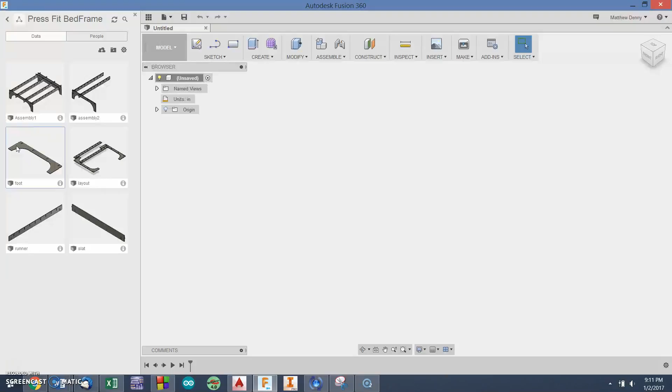Once I have this, I'm going to go over to Fusion and pick one of my parts. Let's say this foot piece here. Yours probably won't do that.

Once I have the piece, I'm going to look inside sketches. Mine's made up of two different sketches, which isn't a big deal, but you might have multiple sketches here. If you do, you're going to want to follow this next step.

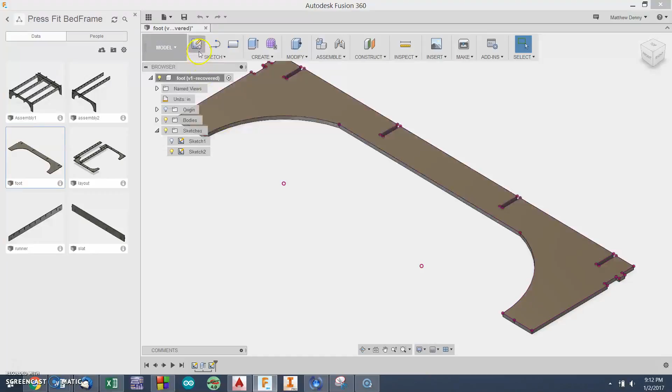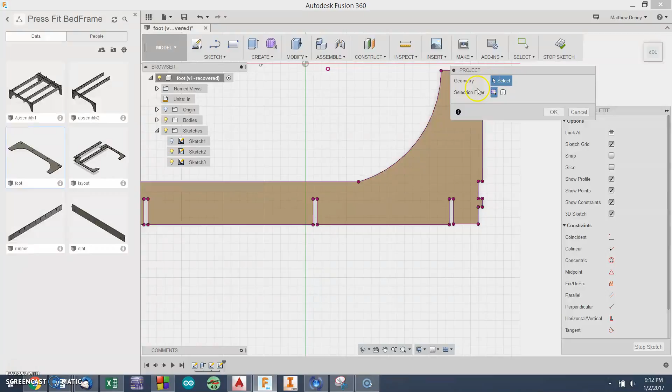First, create a new sketch, select right on this face, and come back to sketch and select project. This is under project include, and inside there is project, and I'm going to select just this outline of my whole object here. Select this shape.

Now, what that did is created a new sketch. For me it was sketch 3 - it would be whatever the highest number sketch is for you. That has the outline of the entire shape.

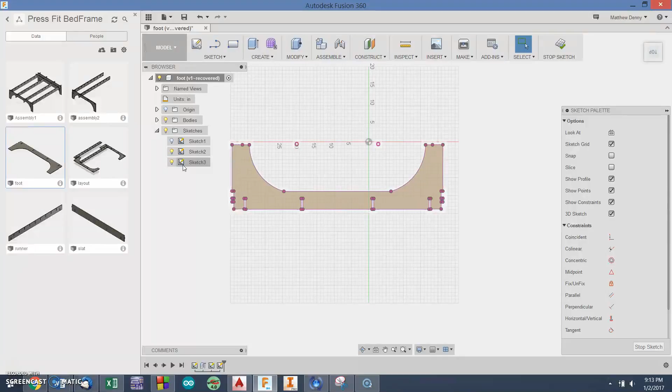Then what you're going to do is right-click on that sketch and hit Save as DXF.

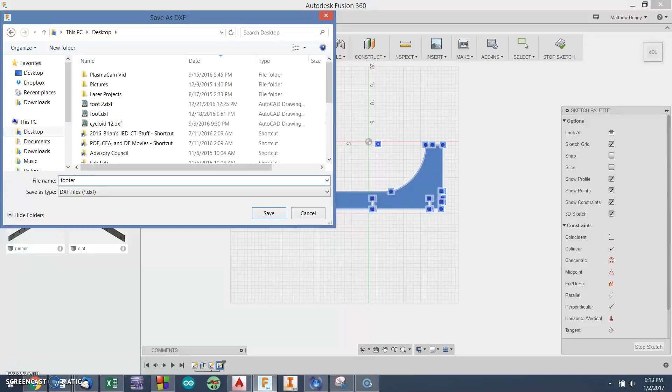It's going to ask you where to save it. I'm just going to put it somewhere on my desktop and give it a name. When you go to your desktop, there should be a file there, and we can double click it to open it.

Notice it will open in AutoCAD. Now, I may not actually be able to see anything yet because I could be zoomed in too far or zoomed out too far, so I'm going to hit Z for zoom and A to see all. Now I have something I can work with.

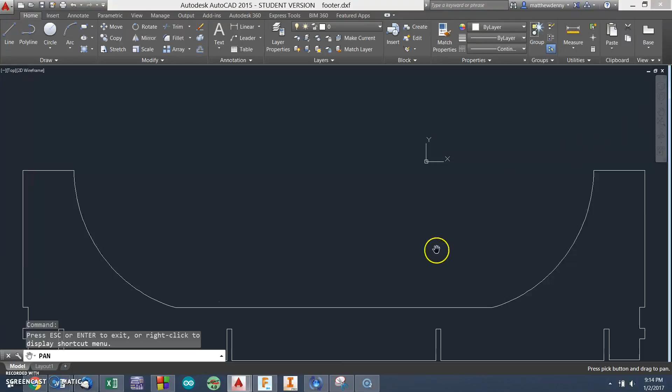Here's my object. Now I want to select it, make sure I select the whole thing, and I'm going to right click. We're going to copy it from this file over to our other file.

Here's the mistake people are going to make. They're going to select copy selection - that is wrong. We actually want to go up to clipboard and copy.

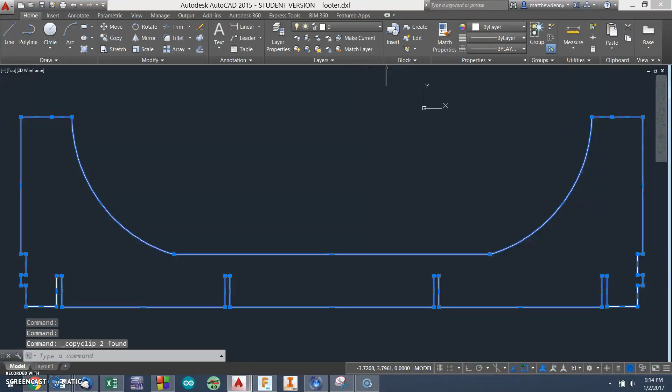Now I'm going to go back to the AutoCAD file that I had previously, and I can right click again and go clipboard, paste. Notice it will now paste in here, and I have the object.

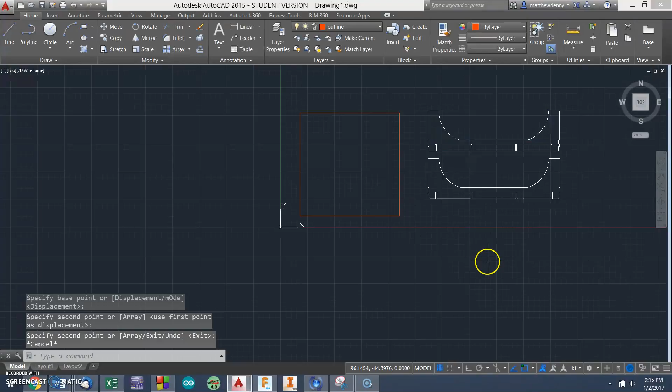Obviously mine's too big for the actual piece of wood, and that's fine because I wasn't actually designing any furniture. But if I had two of these, I want to make two copies - however many parts you're actually going to physically need for your object. The goal is to try to get all of these arranged inside of your 48 by 48 inch square.

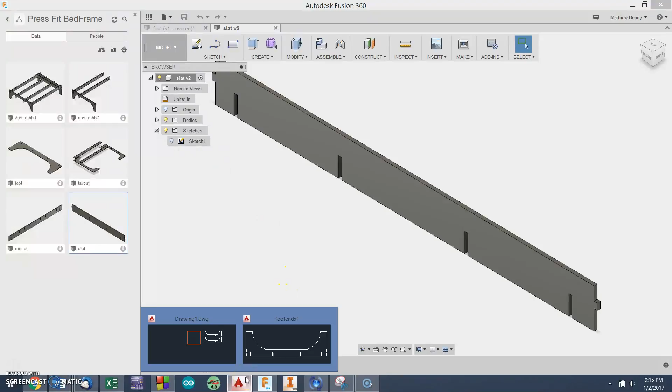For each part, you're going to do the same process. Open the file. If you have more than one sketch, you're going to want to create a new sketch and project it, use that recent sketch, save it as a DXF, then open it up in AutoCAD, select it all, copy it using the clipboard, and paste it into the AutoCAD file with all the other pieces.

When you get done, make sure you save this final one with all of the pieces in it. If you have 2 footers, make sure you have 2 footers. If you have 8 slats, make sure you get 8 slats - however many actual parts you need.